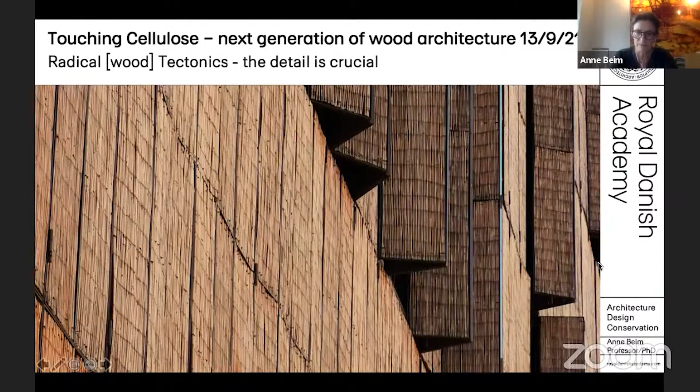Here we go. I'll start with the overall concept of tectonics, how do we describe it, or how do we define it, just to have everyone on board, so no one is sitting here thinking, what is tectonics all about? What does this term mean? So just to repeat what I explained in April, when we define tectonics, and I could have several lectures about that in itself, tectonics is a part of architecture as we see it here in the triad of Vitruvius, the ancient architectural theorist and practicing architect, who wrote the first treatise on architecture, 10 books of architecture.

He defined architecture within three different dimensions: venustas, which is beauty, utilitas, which is utility or use, and firmitas, which is technology, the real-time dimension of matter. And in that sense, tectonics is leaning towards the firmitas, that is the relation between the material, the techniques, and thereby also the form. So it's the little brother of architecture, you could say. But it has to do with a deep understanding of the material, its properties, and also the different tools and methods that have to be applied to work with the materials, and thereby also how the forms and the results turn out by this interaction.

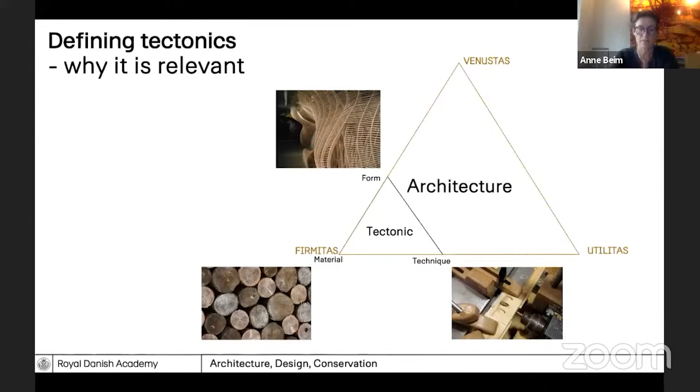But as for the tectonic in architecture, we could say it defines the correlation or the interaction between the architectural intentions and the material properties, the form principles or the anatomy of the construction, and thereby also the choice of building technologies and techniques, and finally the structural rules present in construction. So it's about the specification, designing and joining of materials, and how they form an architectural synthesis. And thereby it also addresses the dimension of architectural ethics. It's a way to direct and control resources in construction.

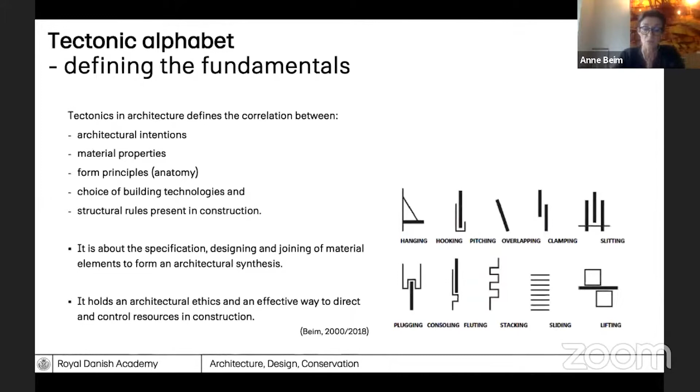But before I return to the question of tectonics, I'll start in a different setting. As I mentioned earlier, in this lecture I'm trying to draw a bigger picture that also engages some of the ideas of the overall technological development as presented by Herman Blumen this morning, but in a different way, in that we also have to look at the different materials and technologies as a catalog, a diverse way of looking into new structures and new sorts of architectural articulation. And why do we have to do this? That's because of this ecological crisis we are facing.

It's not only a climate crisis, but it's a much larger critical situation we're looking into, and we see that now at many levels. So we see these critical global challenges across biodiversity or lack of biodiversity, increasing waste problems, and also the question of material scarcity, and not least the climate crisis that also affects different areas of the world, where we can build, how we can build, and by which sorts of materials.

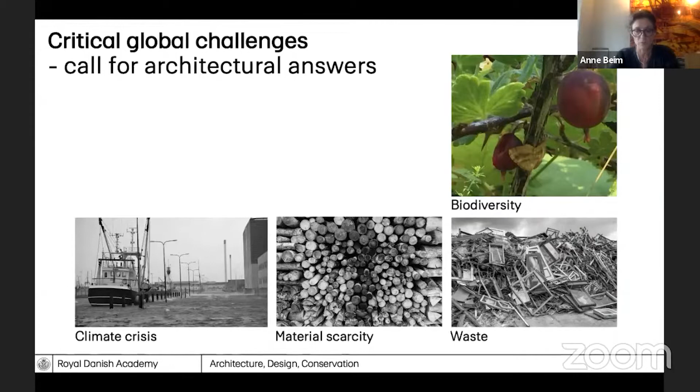So as for the ecological crisis, the building and construction industry actually has a very high impact on the different numbers. We see that 35% of the total energy consumption comes from the construction industry. And we're also responsible for 40% of the greenhouse gas emissions. We're also responsible for 40% of the total material consumption. And in the EU, we have about 30 to 36% of the total waste.

All this together, we have to look into in different ways, but at the European level, we have decided that in 2050, we have to have a full reduction of 100% of the greenhouse gases, of the CO2 emissions. And in Denmark, the present government has decided that within the next 9 years, we have to reach a reduction of already 70%. And that is because they say that this is something we can reach pretty quickly, by means of changing procedures.

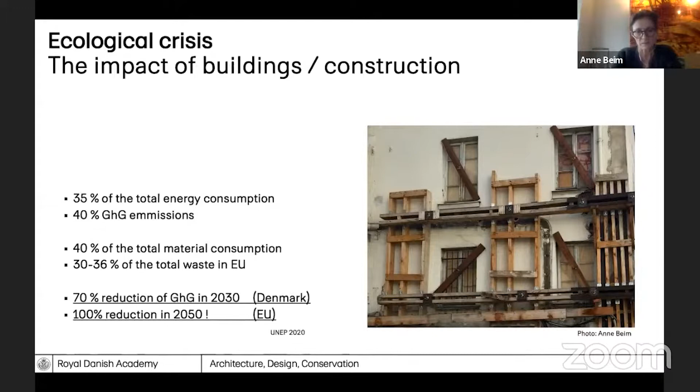However, colleagues of ours that are engineers, researchers at the Southern Danish University, look into these sorts of numbers and they say, well, in order to reach these ambitious goals, we have to work from an overall understanding of our planetary boundaries, and thereby define what we could call some sort of absolute sustainability that doesn't reach beyond the planetary boundaries, but actually helps us to provide different sorts of solutions that reach these numbers more realistically and actually show a very quick change.

So what they have done is study a large number of standard family houses in Denmark. They've said in order to reach these goals, we have to reduce by 89%, we could also say 90%, the harmful environmental effects of construction. And we have to reduce by 80% the greenhouse emissions from energy consumption. And finally, we have to reduce the living space per person by 60%.

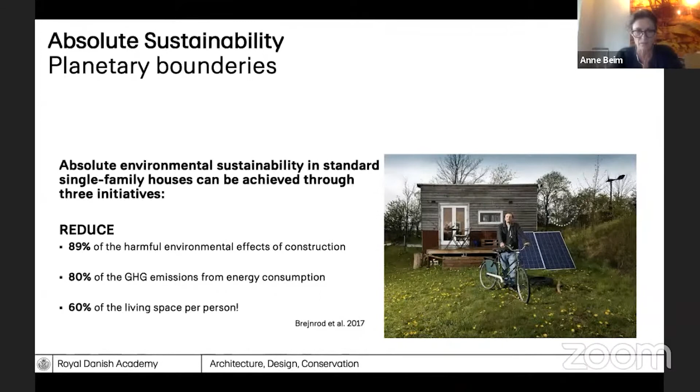And today we see in Denmark this sort of new movement that is called tiny houses, and here's one of the examples of that. Some people believe that living in very small houses, only taking up the minimum space for themselves, and also having solar panels and biking around, is maybe the way to go about it. But at the same time, if all people around the globe would do the same thing, there would not be room enough for everyone. So we have to find ways to engage in these sorts of questions by a number of different approaches.

So if we look into the question of absolute sustainable architecture, we have in our research centers tried to see what this means and how we actually go about it.

So we tried in 2017 to use what we in Danish call 'taking our own medicine' - in the sense that if we have to reduce by these radical or high numbers, we had to reach a different way of construction using other sorts of materials. So we were asking ourselves: how can we design architecture and build according to absolute sustainable principles? And what are the consequences for the use of materials, the building techniques, and not least the tectonics and architecture?

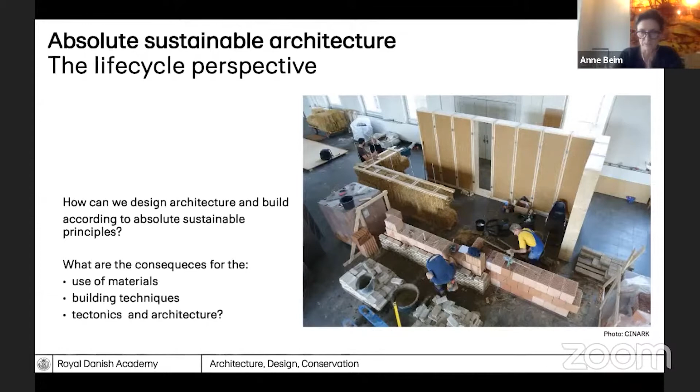When doing this, we came to three main materials we wanted to look into, which ended up being the only ones we could more or less apply. We wanted to test this according to an overall understanding of the material properties, but also the craft tradition and building culture, and not least how we could scale it up according to contemporary construction industry and manufacturing systems and procedures applied there.

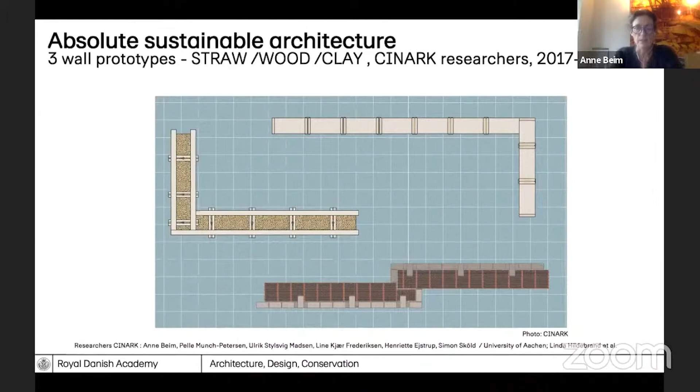So what we did was sit down and write what we call the Manifesto for Circular Construction. We very quickly found out that in order to reach these goals, we also had to make sure that the materials applied would stay in circular loops in terms of reuse and recycling. So that's why the circular concept also came to play.

And this is only part of the manifesto. We knew we had to - and I'm going to put it in the opposite order - leave out materials that would demand great amounts of non-renewable energy in production, or that had a severe negative environmental impact. That would primarily be materials made of raw oil that are synthetic, and materials damaging to the health of humans, animals, and nature.

In addition to this, we knew we also had to minimize the amount of material and the number of different materials in constructions, and use uncontaminated materials without additional treatment. Use construction joints that could be disassembled, and finally try to reduce waste in production.

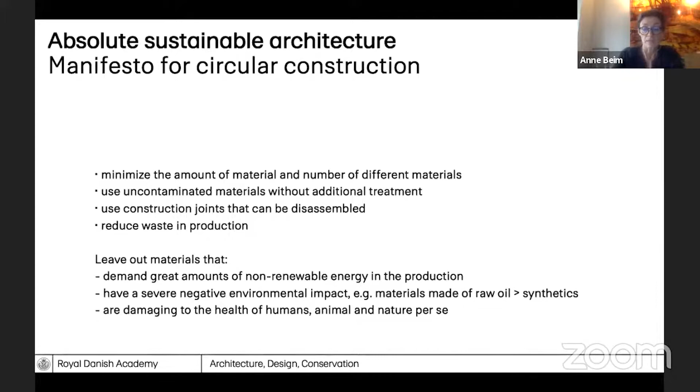Part of this manifesto was also generated on the background of this small construction material pyramid - this is actually the second version, there's a primary one before this. It was developed to find out: if we have these different sorts of materials and calculate the CO2 footprint per kilo, how do these different materials actually perform in terms of CO2 emission? These materials very quickly showed some that didn't have negative effects on the environment, and were also applicable in many different ways for what we could call basic wall constructions - at least that was what we wanted to try to test.

But we also see that we have the metals or the insulation materials at the very top of the pyramid. Those were, of course, materials we also know from the contemporary construction industry, that we wanted to see - okay, in case they're part of the larger picture, how little can we use it, or can we replace it with other materials?

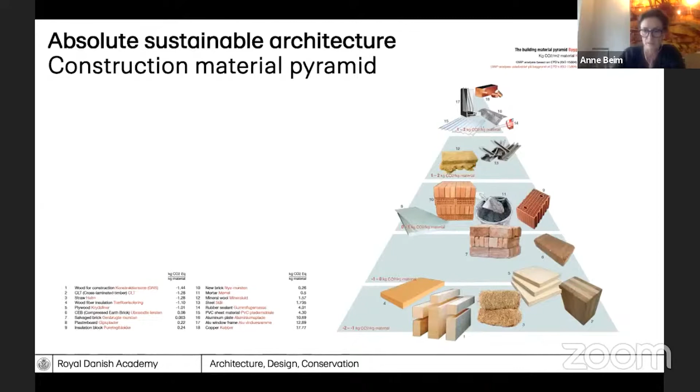Following up on both the manifesto and the construction material pyramid, we defined this strategy for what we call radical tectonics: that we wanted to use these pure materials, basically hardly treated or manufactured into other levels of refinement. We wanted to use the dimensions and measures dictated by industrial standards in order to eliminate waste.

And the least possible degree of processing of materials and components, in order to minimize the amount of energy in manufacturing. We wanted to use reversible joints in order to retain or salvage the different materials or components for further use, and also have very simple assembly and construction details - all together for a low CO2 footprint, applying standard components and only few custom-made adapted components.

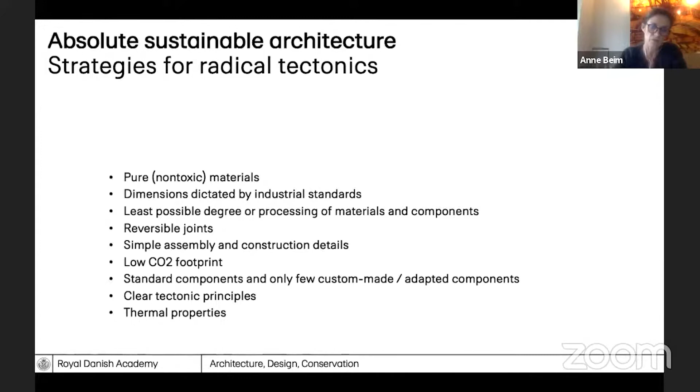We want to apply clear tectonic principles and pay attention also to the thermal properties, although this was not a full realistic or realizable construction. It was a test of this radical tectonic idea within the overall theme of absolute sustainability, or absolute sustainable architecture.

So we continued testing these radical tectonic experiments in three different main materials. The first was the wood prototype, where we developed a prefabricated module insulated with wood fiber. Importantly, we didn't use crafted joints of wooden elements, which is often applied. We screwed the whole frame together to be able to dismantle it again, and also had specific small joining elements of metal. So we had a clear priority in terms of what materials we applied, for what purpose, and what amount of material was within the structural element.

That calculation or design strategy was part of the work all the way through. In order to do that, we also applied what we call the tectonic alphabet, shown here to the left, as a way to optimize and categorize the different structural elements, making sure each element was applied in the best way according to how it's situated in the structure and due to its specific properties.

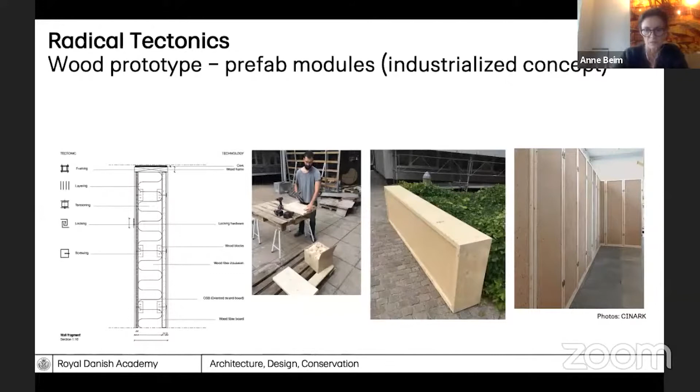So we came up with this wall element that was assembled with joining brackets, like a key lock that locked the elements together across a cork plate.

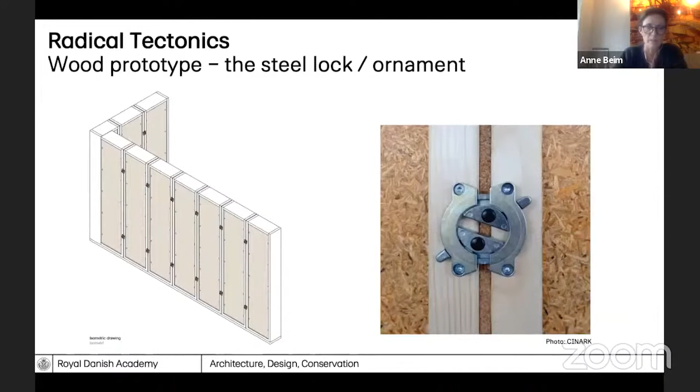The second wall was made of burnt clay, with the Poroton clay block as the main structural element. In this case we wanted to use a very highly refined construction element, the Poroton Ziegel block, or brick block. You use less energy to burn these blocks, and you get a higher performative outcome. Instead of putting up one brick after the other, you have these larger blocks that can be assembled without any mortar in the vertical joints, which increases the insulation of the block itself.

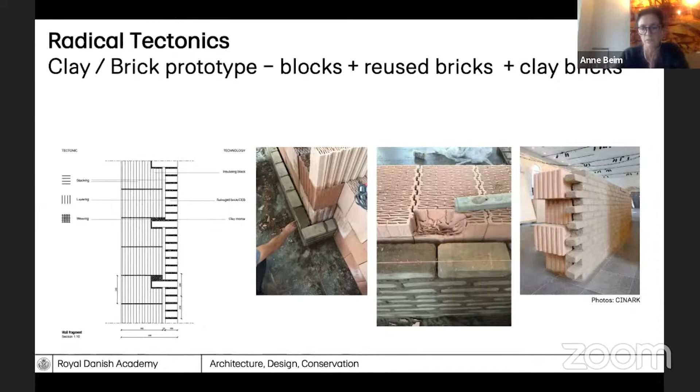At the same time, it cannot stand outside in the weather, so it needs some cover, either plaster or brick cover. In this case we tested it together with the unburned brick, but also with reused bricks on the other side. It turned out to become what we call the braided wall, because we wanted to apply original brick procedures and brick techniques to make the structure stable, rather than using what we do today in contemporary construction, where we use steel rods or steel bonds between the inner and outside walls.

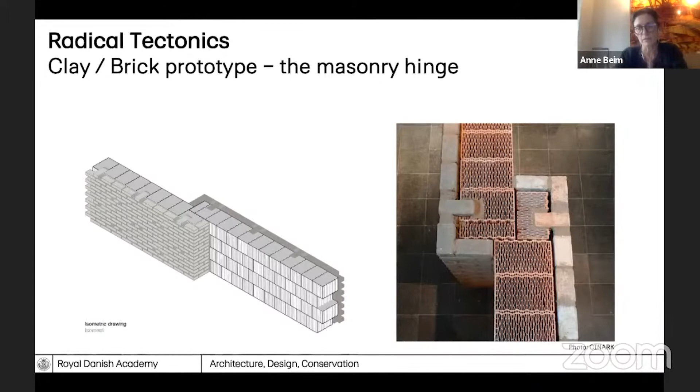The final wall was made of straw, using straw bales stacked on top of each other. They have a hard time standing by themselves, so they had to be reinforced with steel rods. They were also made in a layered structure of wooden frames that would divide the surface into panels that could be treated or plastered with clay mortar on top, also to serve as a fire hindrance.

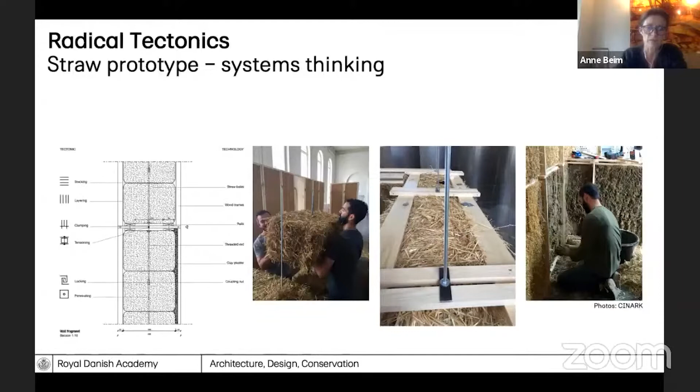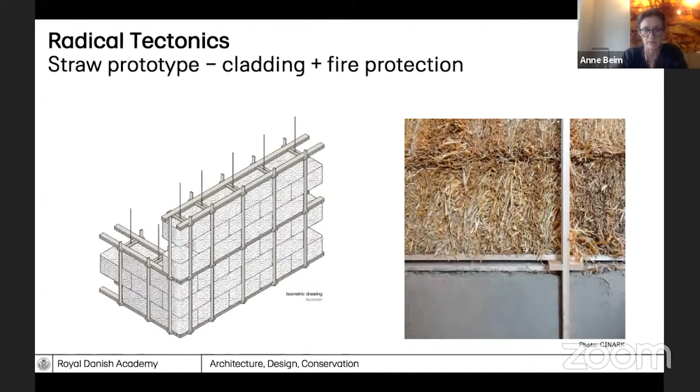This structure ended up as a fundamental low emission structure, where the cladding and fire protection were particularly among the main issues when defining and designing this construction.

So the overall aspect of these three experiments was that we were concerned with reversible joints. They're important in order to take the structures or construction apart, and also take each material within its own fraction to be reused, or as larger modules. These joining elements, we've pointed out, could be envisioned as tectonic motifs. By having this disassembly strategy, we also facilitate maintenance of the structure—you can take smaller parts out, or disassemble the full structure.

We also wanted to separate the life cycle of the building from the life cycle of the materials. In that sense, if we apply similar strategies or building techniques in renovation of architecture, we can just renovate parts of the building—we don't have to tear down the whole building.

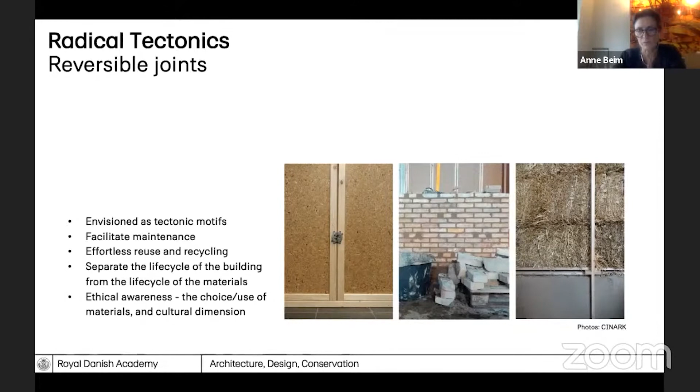As for the three walls, we also analyzed them. It actually was retrospect. This was an experiment that came from the Manifesto and grew over the practical experiments. Finally, we went back and analyzed the different wall structures. This is just showing how the different materials, the percentage of the different materials applied in the different structures.

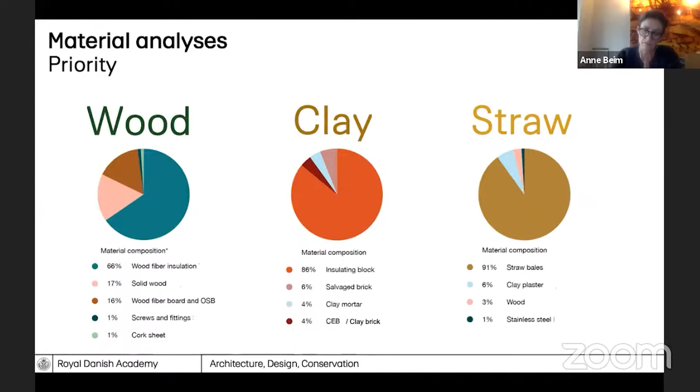We can see, as for the wood structure, the wooden fiber insulation is the largest amount of material used, whereas the cork sheets are the least. In the clay structure, we had the insulating block, whereas the clay, clay mortar, and salvage brick actually have almost the same amount. Whereas in the straw structure, of course, the straw bales were the largest amount of material applied.

Then when we looked at the CO2 emissions, or the greenhouse gas emissions, it was very interesting for us to look at how the CO2 footprint per cubic meter was looking, pretty much as we expected, according to the construction material pyramid.

If we look at the first diagram to the left and top, we look at the processed steel. We can see it's situated in the high end, whereas both the wooden profile and the OSB are in the very low end, or you could say in the minus. Whereas if we look at the proper structure as built, per square meter of the structure, we see now that the processed steel is moving towards zero, but yet we still see that the solid wood is performing very well, whereas the OSB is now moving towards a higher CO2 emission.

So what does this tell us? It tells us that it's not just about the different materials you apply, but also what sort of additional materials to apply, and what is the amount of material applied, which has a great impact on the final CO2 footprint.

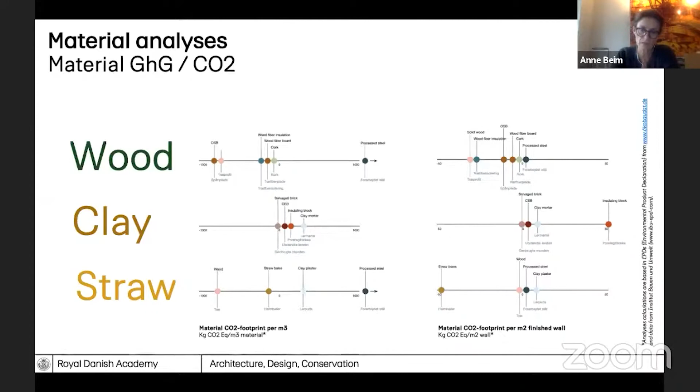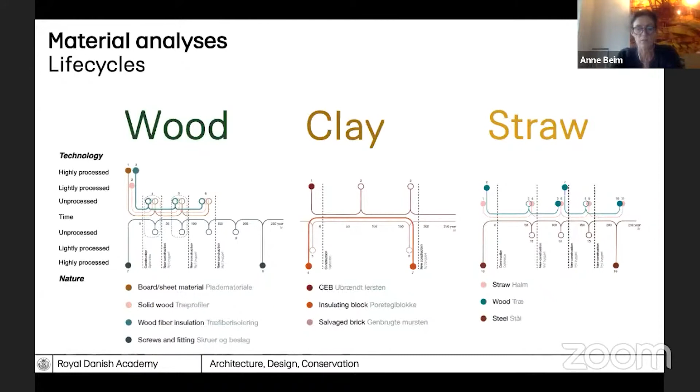So this experiment altogether told us a lot about how these different ways of processing, and how the structure itself has to be thought out and designed, is very, very important, and has to be planned in great detail in order to go back and actually reharvest the different materials in a proper, absolute sustainable manner.

This is an ongoing discussion, as many of you probably know or are part of, because many voices in the construction industry say that it's not true, because the wood itself, as soon as it is taken out of the structure or burned, or is deteriorating in one way or another, the CO2 will be emitted into the atmosphere.

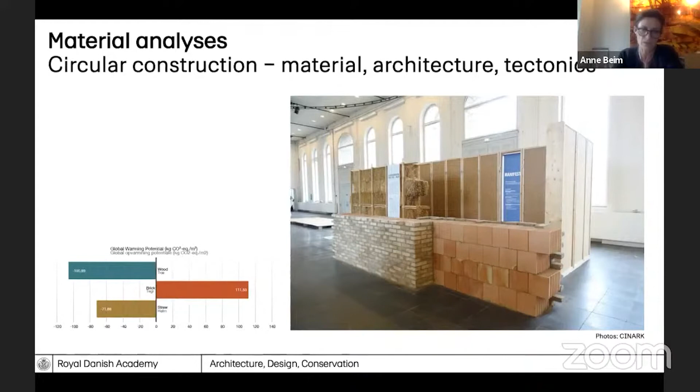However, as long as we can keep these bio-based materials in the structures and in the loop of reuse, the better. Because as for the overall requirements presently, where we have to have these high CO2 reductions, it's important that we apply these sorts of materials in order to reach the reductions.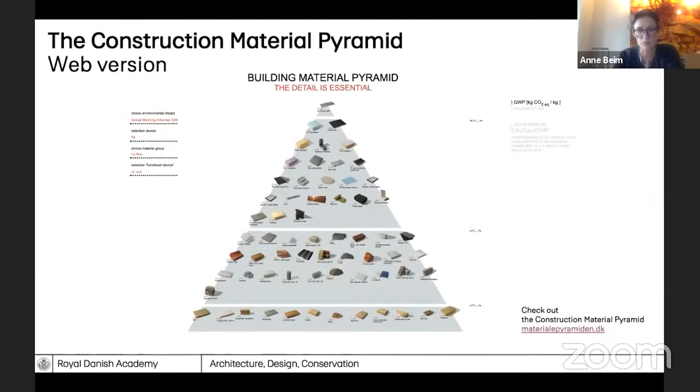So we also apply the numbers and the data from the Ökobaudat and the EPDs across different companies in order to use more standardized measures. So we haven't invented anything here. We have just invented a way of sorting and displaying how these different materials act according to their environmental impact.

Just to mention this very shortly, the construction material pyramid also taps into this overall sustainable lingo which is connected to materials in general. As I just mentioned, we have the environmental product declaration, which is linked now to most of contemporary or today's building materials, and how they are performing according to these different measures I was mentioning beforehand. This is also a standardized way to be able to compare materials across different countries, particularly in Europe, but also across different sorts of manufacturing places.

So then we have what we see now, the ISO 14025 analysis. It's also about the environmental impact of production. This ISO is an international standard that's also being applied across material production. And these two ways of standardizing are also part of the larger life cycle analysis scheme that has been developed over the past couple of decades. That is now also being supplied with what we could call the life cycle cost, where there's an intention to try to look into how much are the costs of these different sorts of materials and their dependencies on one another.

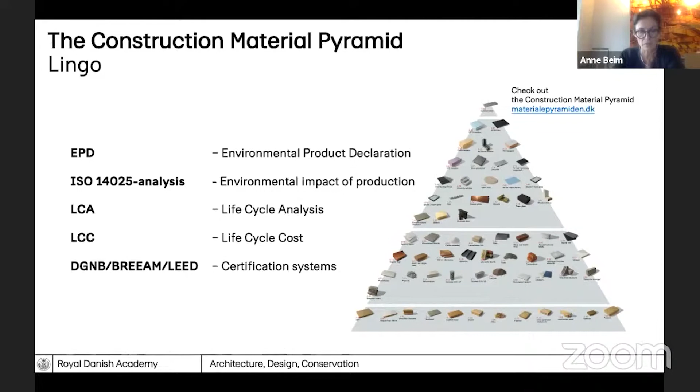And then finally, we also see various certification systems or standards such as the DGNB, the BREEAM, and the LEED, which are defined from different national standardization authorities, where the DGNB comes from Germany, the BREEAM comes from the UK, and the LEED from the US. It has been actually multiplied by numerous additional certification systems across the world. I think most larger industrial countries have these sorts of systems.

But if we return to the building material pyramid, it works in that way that at the bottom of the larger pyramid, we see this small calculator, in which you can choose if you tap the different materials on the pyramid.

It goes directly into the calculator at the bottom of the screen, and here you can define the different amounts, depending on whether you know the volume, the cubic meters, the square meters, or the millimeters of a certain material. It then calculates what you could call your own pyramid. In this case, I tried putting in different numbers to see how it turns out with this sort of distribution of materials, and we end up with a negative CO2 footprint.

So the construction material pyramid is a way to show and display different sorts of materials. I don't mean to say that slate is less harming than wood, or vice versa.

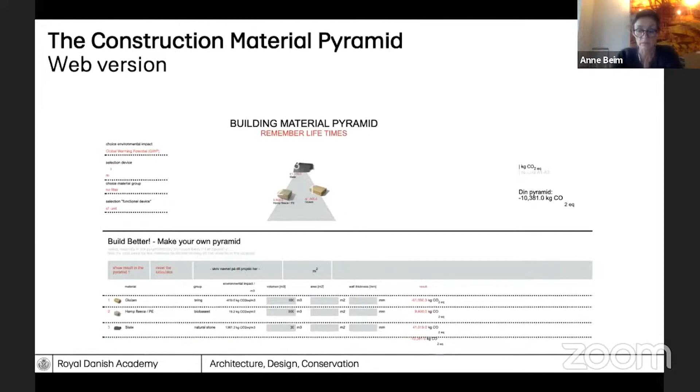So what do we do as part of bringing this knowledge into education? We do that through different means, but one thing we've developed over the years is what we call the research and innovation module, part of the 5th year graduate program, Settlements, Ecology, and Tectonics. Over the past couple of years we've also studied what we call radical tectonics as part of this. This research and innovation module is a collaborative module with partners from the construction industry.

This example I've chosen to present today is not about wood. We haven't had any module where we had a specific study of wood, but wood has been part of many of the different studies, particularly also in what we could call the circular economy projects, where we have a lot of wood being taken down from demolished buildings that can be reapplied in new structures.

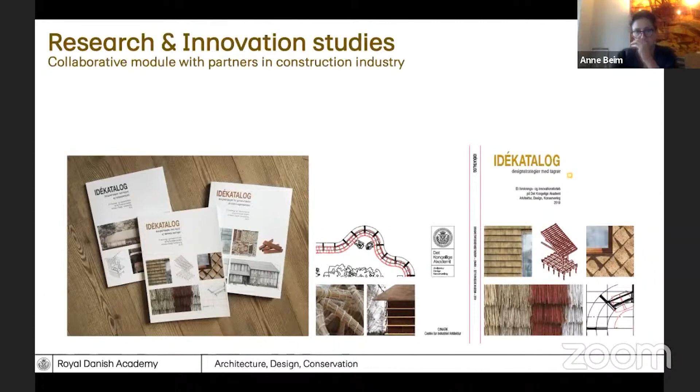So we had these 2.5 months where we worked together with the Thatchers organization, and the students were directly presented to the different craft techniques by some of the high-end thatchers who also train the apprentices at the school of thatching. And here we see some of the students who are trying to test and experiment with the proper craft techniques.

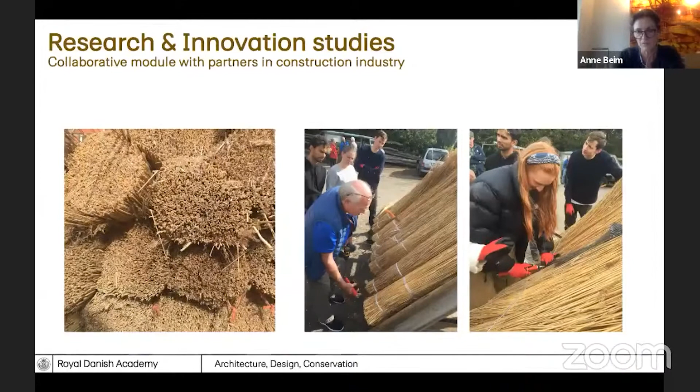We were handed over a great number of bundles of reed, and it was sitting in the studio, and the students were directly confronted with it on a daily basis, and they tried to engage with the material directly, also in the various projects. They usually worked in groups of 2 people. We only had very few students working on their own, and then they were also grouped in larger groups of 5 or 6 students, where they talked about their different projects across different experiments.

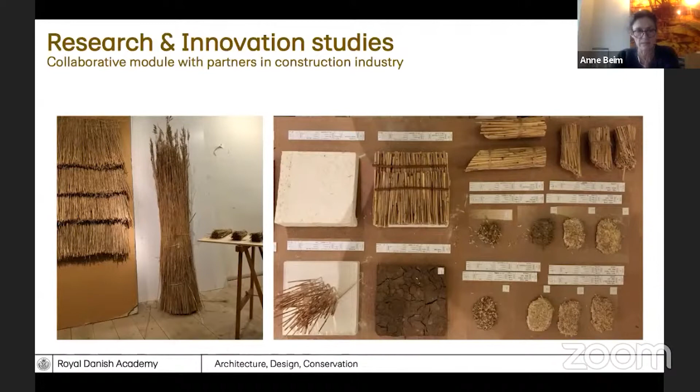What we see here is one group that was trying to test the reed in different ways, where they grinded it and boiled it and tested it as some sort of bio-based brick, and also its structural properties. Whereas in the other image to the left, we see experiments with having it as a regular cladding for vertical structures.

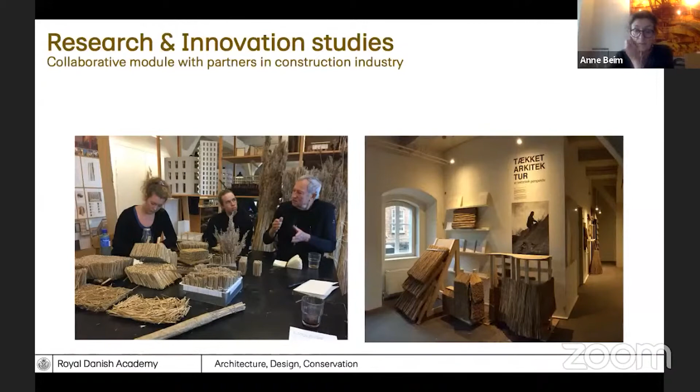And as you see here, at the studio we had the reed sitting all over, and the group we see to the left were testing if they could take the waste product from the reed and form it into these different compressed bricks that could be applied either as a brick or as a cladding panel. And we had several other projects, and as you see here to the right, we had a small exhibition in the hallway of our building, in which some of the different projects were displayed.

What would happen if we clad these wooden modules with reed, and what would be required, particularly in terms of what we tested in the straw bale structure, for fire protection. So they actually came up with almost a new architectural language, in the sense that they took the ground floor and pushed it further back, in order to have an escape way in case people run out of the building.

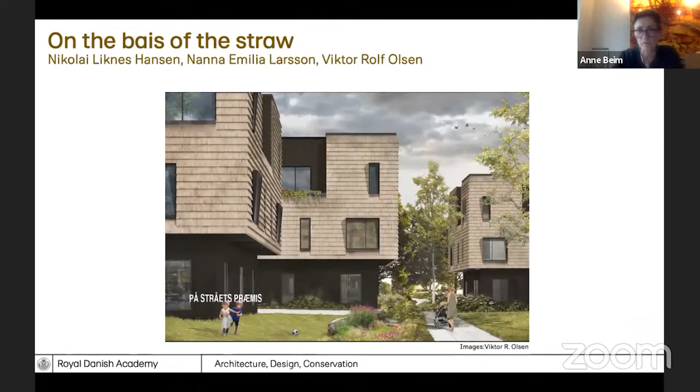You don't want to have burning material falling down at you, so you would have to be able to run from the building. But they also made these hoods around the windows, so in case you were to be rescued out of the window, you would not be harmed by material that might fall down across the facade.

They also tried and tested different sorts of mineral materials, such as clay, chalk, lime, a specific Swedish paint that's also a mineral paint, as a way to cover or impregnate the reed, so it wouldn't burn as easily. And then they also made these fire tests outside here outside our studio building, in order to see how it actually reacted to fire.

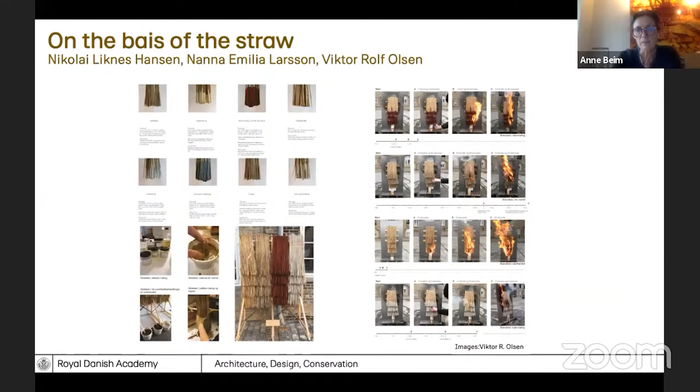And from these, you could say, early experiments, they came up with already some results that showed very quickly that the element, as you see second from the top, which is treated with clay, took some time before it actually started to burn.

So how do we then research in this field of radical tectonics, and how do we bring all of these different ideas together? We now have applied for a project from the Ministry of Environment, where we can apply for money that actually can be used across construction industry, research institutions, and you could also say test institutions.

So we applied for a project where we wanted to test some of the ideas also presented in the students' project: vertically thatched facades with CO2 neutral fireproofing. In this case, it is clay. Part of the project is also based on, you could say, historical studies of traditional building in Denmark, the southern part of Denmark, and the northern part of Germany, because we have found in old building manuals that there are references to clay as a fire retarder or a fireproofing material, together with bio-based materials such as thatched structures.

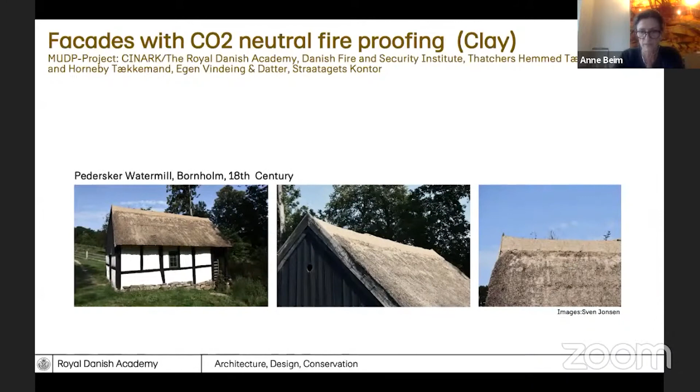And what we see here is actually the Pedersker watermill, which is originally from Bornholm, the small island in the south of Sweden. It's part of Denmark, and this small house actually has clay, as you may see, on the very top of the roof, and the clay washes out down over the roof, and in that sense it protects the roof in case of fire, but it may also have some other sorts of, you could say, impregnating or protecting properties for the reed.

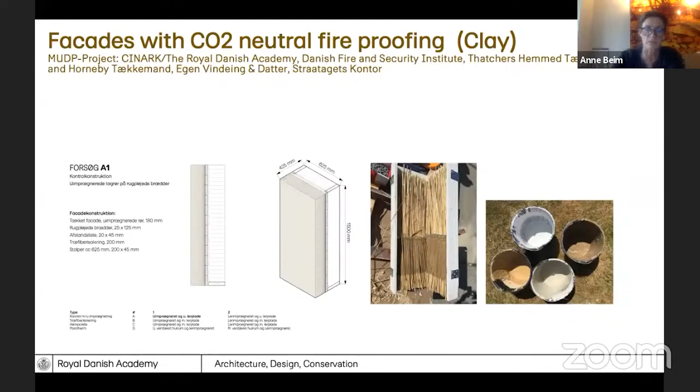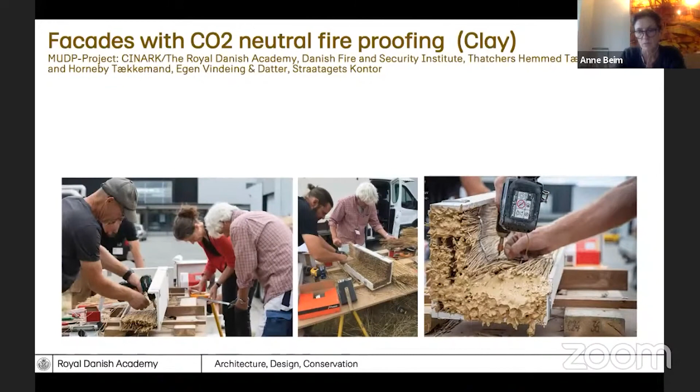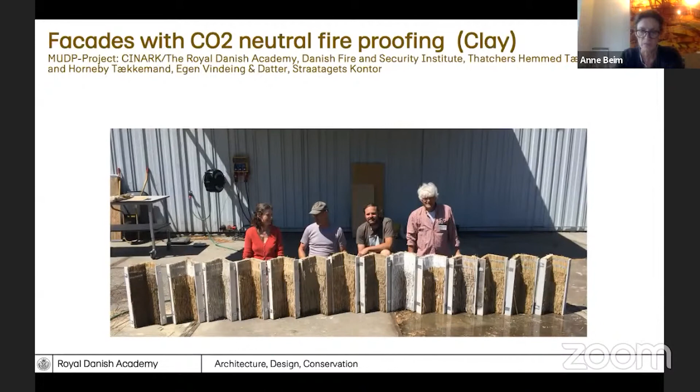And the guy with the cap, he is Dutch, Ruud Koning, who also was one of the main thatchers of the Vadehavs Center, a very well-known museum designed by Dorte Mandrup, which is right next to the flatlands of the west coast in the southern part of Denmark. So it's a very good group of people who have engaged in this project, and what we see here are small fire tests that had to be developed first in order to be able to scale it up for larger structures. And we have all the 14 elements with the different sorts of impregnation and how they are burned. They're actually exposed to fire for 20 minutes.

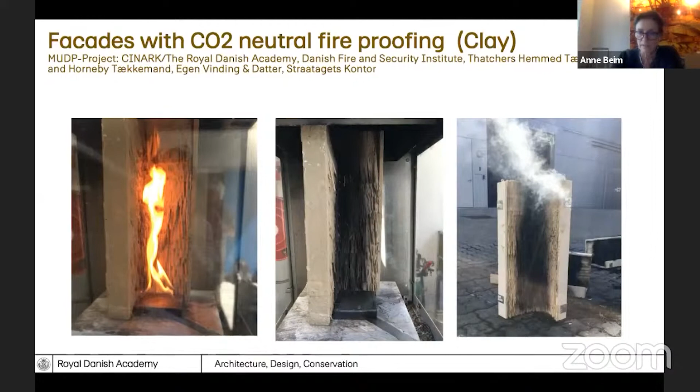So the material itself really has to be fully, you could say, covered in clay, but it also shows if it has any effect when it's exposed to the flames for such a long time. So what we see here is one of the elements that has been fully covered in clay, and how it does get black and it does sort of charcoal on the surface, but it doesn't burn.

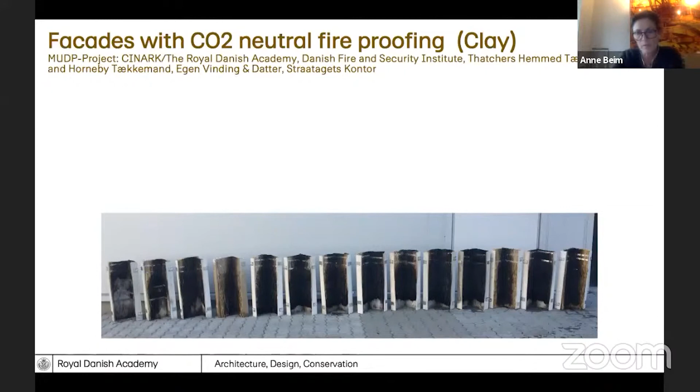And these are the same 14 elements all together, where we see the one to the far left, which was an untreated element, is almost burned away. Whereas we see the fourth from the left, the final one, and the third from the right, that all have been covered in clay in one way or the other, actually perform very well.

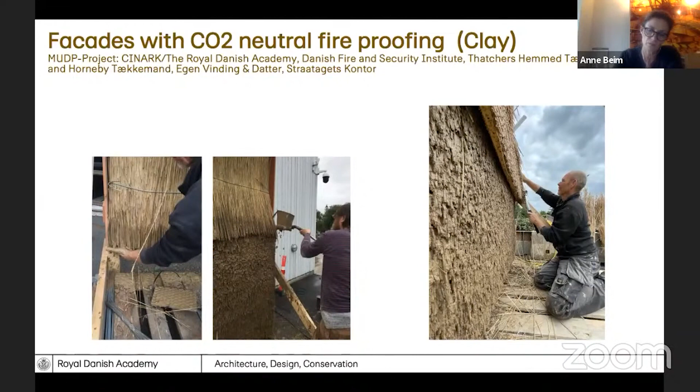So now we're in the process of scaling up the different elements, and also wanting to test it together with other materials. In this case, we have not only covered the reed itself, but we have also, what you see here to the right, added a clay plate. It's actually a Claytec plate that becomes part of the structure. And it's to make what you call a fire stop, where if the flames crawl up over the facade, it makes a different sort of movement in the flames, and therefore it also hinders the fire from growing quickly.

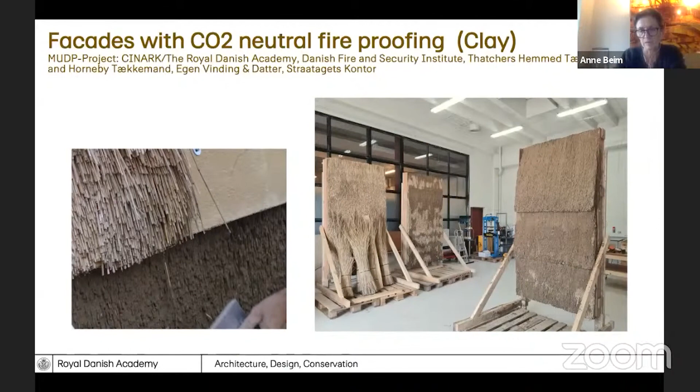So these were the three main elements. The one you see on the image to the right, standing to the left, is an untreated element, a regular thatched element, whereas of the two other ones, we have a regular one that is covered in clay to the right, and the one you see to the far right has this sort of fire stop with the clay plates also integrated, also making this sort of horizontal line.

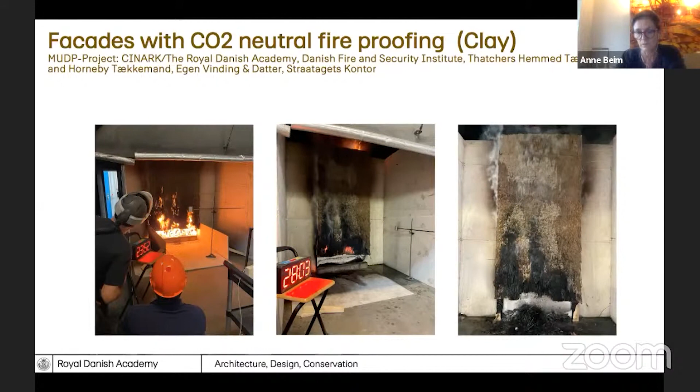And this is being burned with the gas flame for 30 minutes. And then we see now here to the right how, after 30 minutes, of course, it does start to burn because it heats up, but actually it doesn't burn away as an untreated element would do.

As for the load-bearing structure in the back, we are at this moment planning to have what we call the EcoCocon, an industrially manufactured straw bale element. It's a prefabricated straw bale element where the different materials are applied for the most high performative characteristics, such as the wooden part of the structure being applied where it's supposed to strengthen the materials that have a less load-bearing capacity.

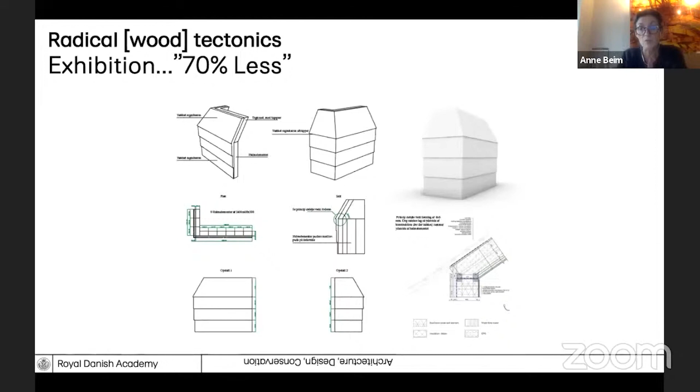So in that sense, we have tried to optimize or focus the different material properties for the different application purposes of the structure, but also for the architectural design.

As for an architectural approach, it's about choosing an overall strategy. We have to focus on specific materials, or specific ways of dealing with the materials, in order to be able to harvest them again later when they have been serving their function in the structure or in the building.

And a way to focus could be, as we did, we started out writing this manifesto, and one thing took another, and we ended up making the construction material pyramid and also having this ongoing one-to-one testing parallel to this. So it's also about defining the principles, by which design rules and fabrication methods we are working.